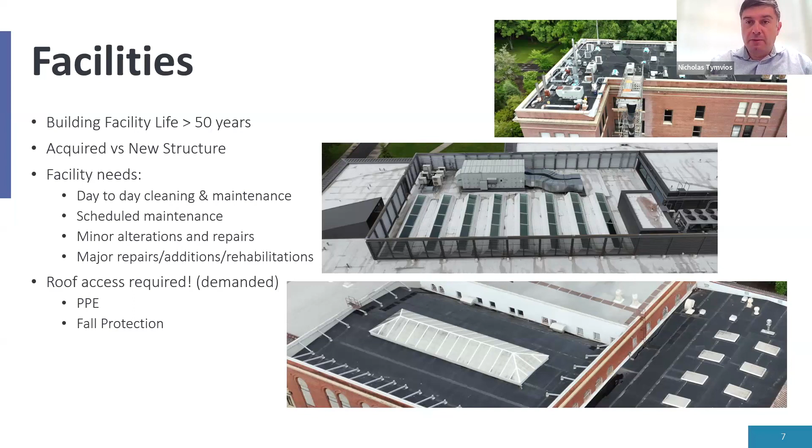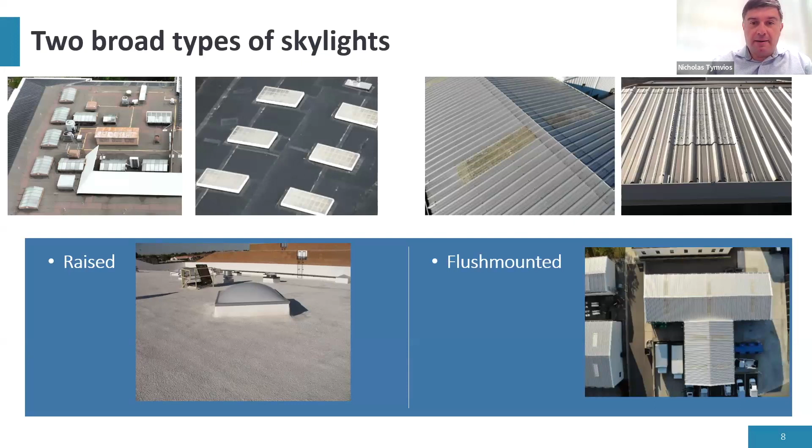We have two broad types of skylights, and we call them by the unoriginal name of raised, meaning they are protruding from the roof upwards, and there's probably a slight ledge in there. Here's one example. Here's a couple more. Or flush mounted, where, as the name says, they are flush with the roof surface, just like this example right here, which came in from one of the facilities that we work with.

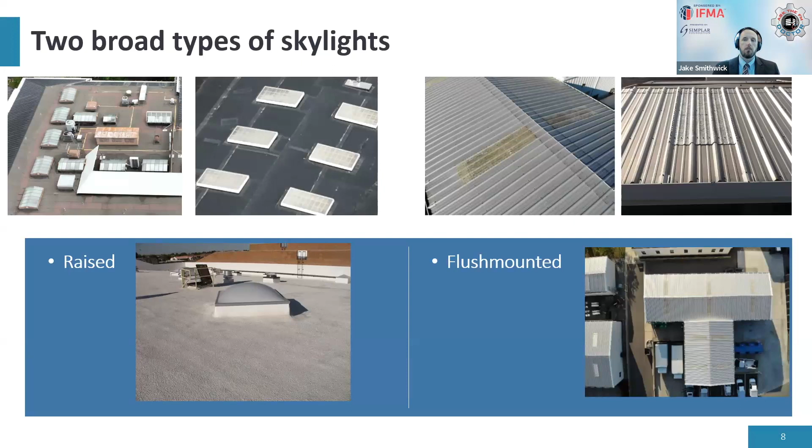Yeah, I think it's interesting, Nicholas, those flush mounted skylights. For anybody that's walked on a roof before, I've done a bunch of roof walks over the years, and look at that one on the upper right hand side. If the angle of that sun wasn't right, there's no way you'd be able to see that, right?

So I just think that what you're presenting here is super valuable in terms of helping us realize the real danger that we see in our roofs, and it's something that we definitely need to be concerned about. For sure, yes. And I would definitely not, I'm colorblind. I can't see that difference between those two colors. So for me, that would be a hazard waiting to happen to cause a fall right there.

So we looked at all these roofs, and the good thing is OSHA has a good database of incidents online. So we scoured that site between the years of 14 to 19, and we looked at any incident involving skylights that was available on that OSHA website. So we looked at a 6-year period from 14 to 19. We looked for this keyword skylight, and we discovered 204 incidents in that 6 years, which resulted in 112 fatalities and 93 injuries. In total 205 people. One incident had both an injury and a fatality.

When you look at that on a timeline, you immediately see that there seems to be kind of a discrepancy in there, especially with the number of injuries. They appear to be a lot in 17 onwards, but very few earlier on. But the trend generally is that the incidence of fatalities are increasing. So what we discovered later on was that not everything is reported to the OSHA website, especially for injuries. And we feel that, yes, the data is disturbing, 204 people falling through skylights in 6 years, but we feel that the data is missing, is underreported.

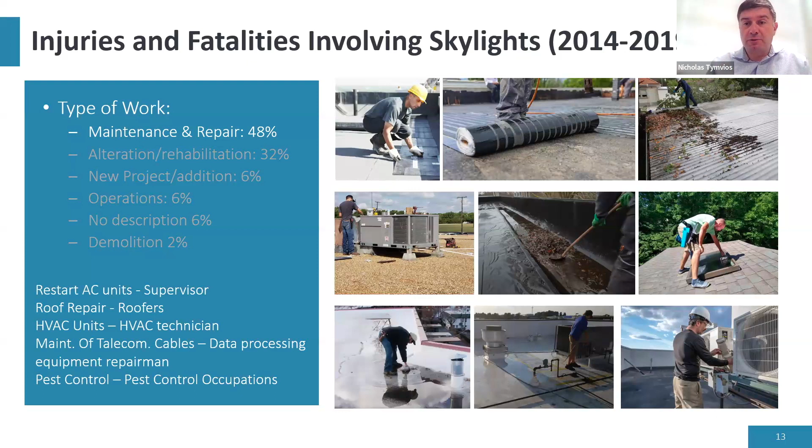When it came to alteration and rehabilitation of the 32% of the incidents, as you would expect, a lot of that comes with the construction trades and things like repairing of metal roofs, installing electrical wires, carrying equipment, vacuuming gravel, and applying waterproof membrane. The majority of these incidents included construction workers.

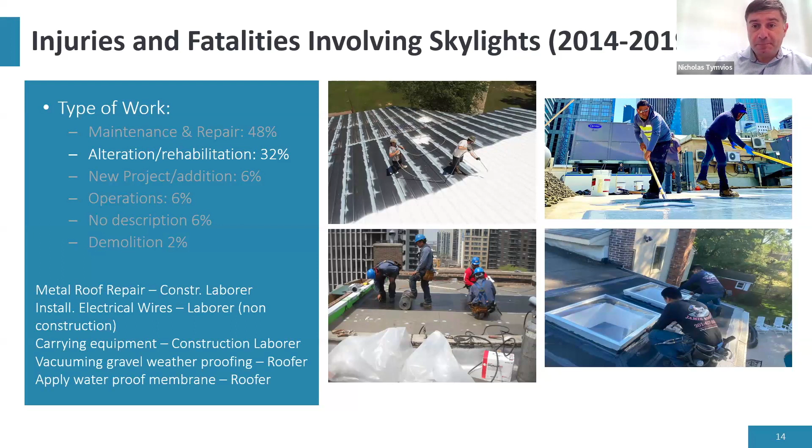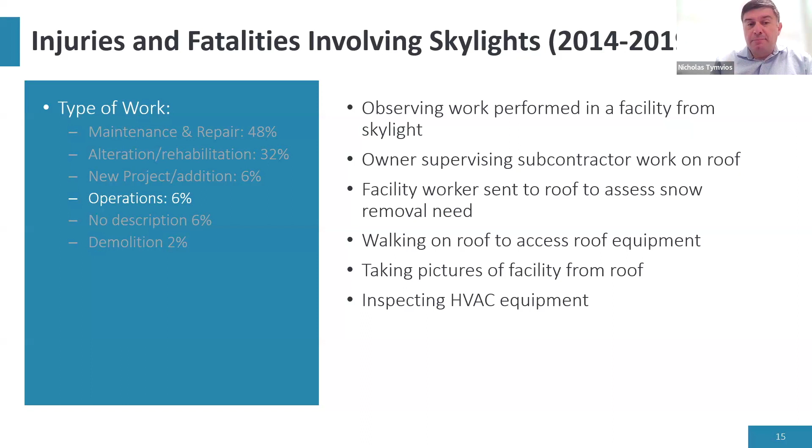In that category of operations that I described earlier on, we looked at people that were going about their day-to-day work, people who were occupants of the facility doing their day-to-day work, and they ended up falling through a skylight. So things like observing work through the skylight, owner supervising work, assessing snow removal if there's a need for snow removal, walking a roof to access roof equipment, taking pictures, and inspecting HVAC equipment as well.

So we ran through news reports from the different local sites and news sources, and we discovered several incidents that were reported in the local papers but were never reported to OSHA. So we cross-checked OSHA for any of these incidents, and they were missing.

Looking at the industries involved in all those incidents, looking at the employers of all those people who were injured or killed, as expected, the majority of them belong to a construction company, 14% in manufacturing companies, and all others, 14%. So you can tell from this information, it's not just construction workers who get injured, it's the occupants of the buildings as well. Looking at all those construction workers, as expected, the majority of them are roofers because they do the majority of the repair on roofs.

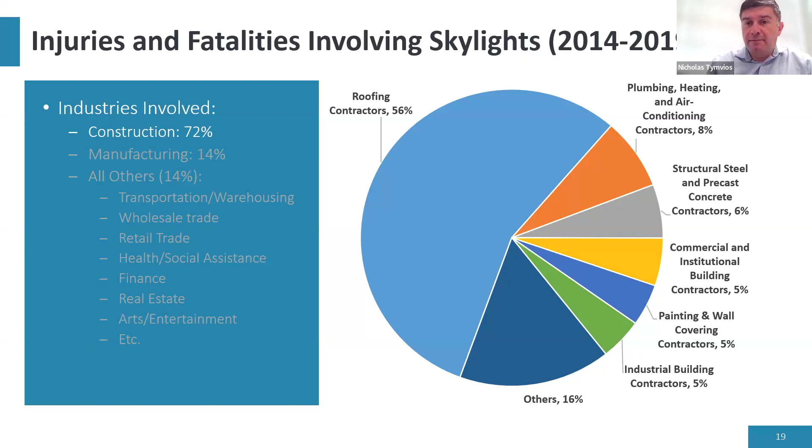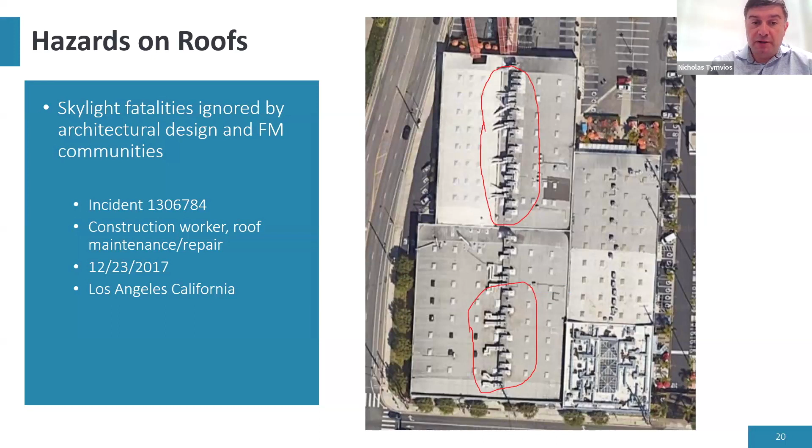We're also finding that many times roofs are becoming an extra floor for everybody for work or for generating electricity, as it happens in this case right here, where the building, an existing building in 2011, was a flat roof full of skylights. And then in 2013, they put a lot of solar panels, and all of them next to the skylights as well.

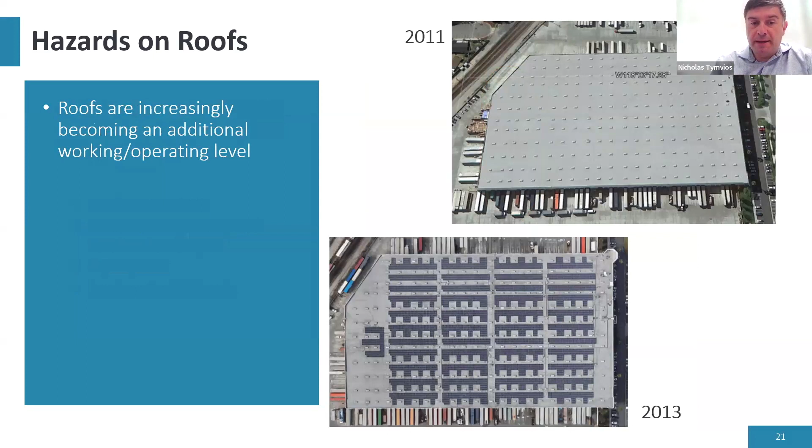And in 2018, there was an incident where a person not involved with the solar panel installation was asked to clean the solar panels and fell through one of those skylights. This was the second incident on that same facility. The first incident happened during the installation of the solar panels, but it fell outside our time frame of 2014 to 2019 to be included in the information here.

So we presented the hazard of skylights, and we showed that it's not just for construction workers, it's not just for roofers. Everybody can be involved in an incident involving skylights. So we need to find a way to protect ourselves and our workers when they go up on roofs. So here's a few solutions out there. Some are permanent, some are more temporary.

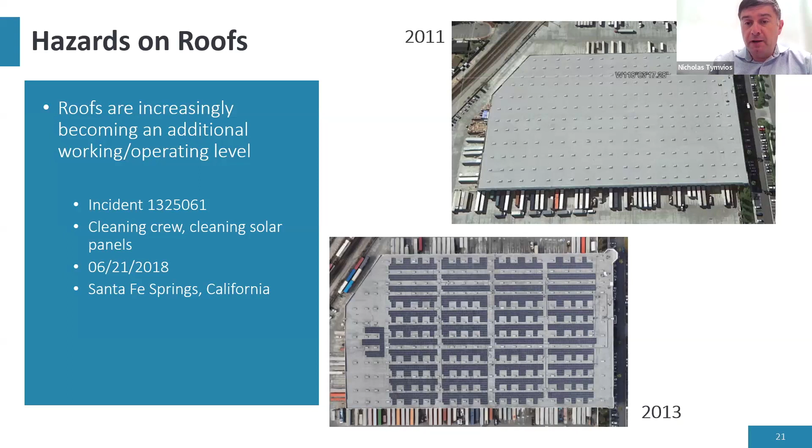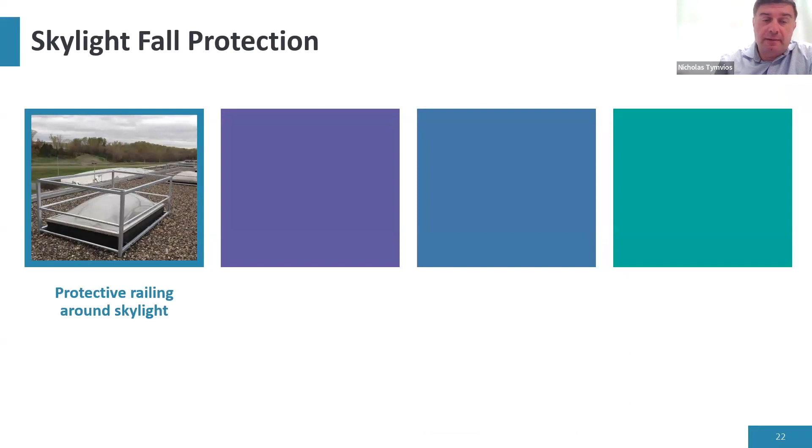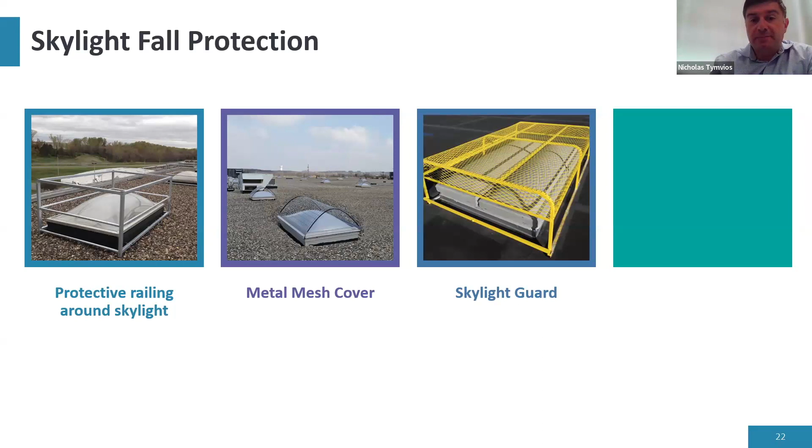So looking at more permanent solutions, we can install a barrier, a railing around every skylight. We can install a mesh over the skylights that can be used to prevent somebody from falling through it. We can go even further, installing a more robust skylight guard like this one here. And for those flush-mounted roofs, we can install something that looks like a wire mesh, but is strong enough for somebody to step on without breaking the skylight below.

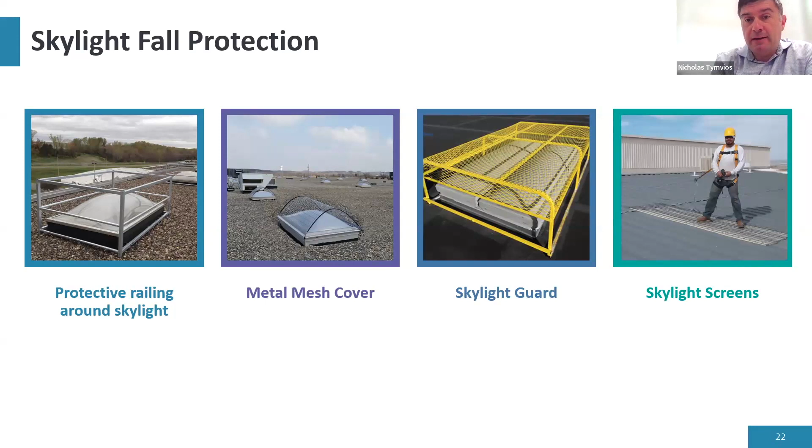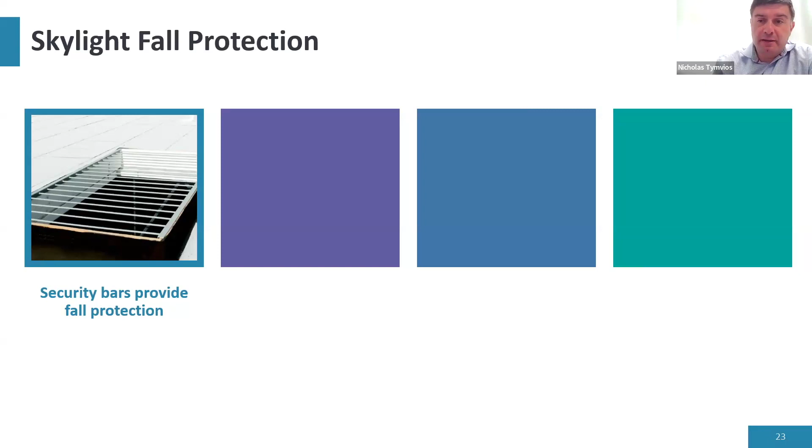Here's a few more examples. Some of those security bars that are placed on skylights can be used for fall protection. The skylight would shatter, but the person would not fall through it. We can also include a net with a ratchet as a temporary solution when we have people on the roof, so that if a person falls in there, they're caught by the net,

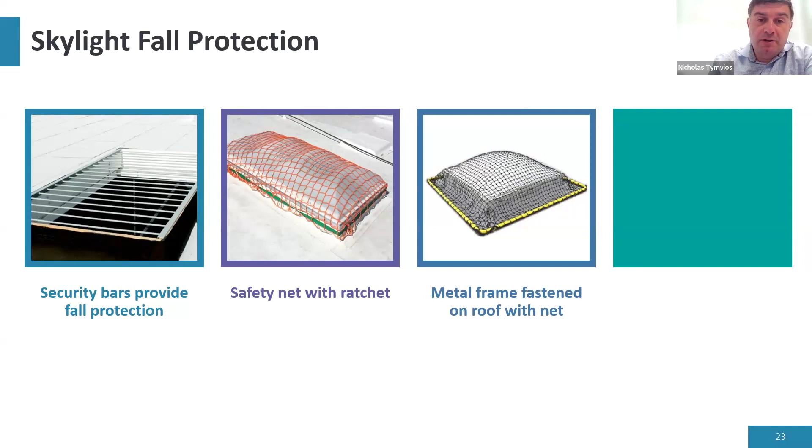or putting a net over a rectangular frame that will cover the skylight. So if a person falls on it, the skylight would shatter, but the frame would not, and would prevent the person from falling through, or even implement temporary guardrails all around that skylight or roof opening.

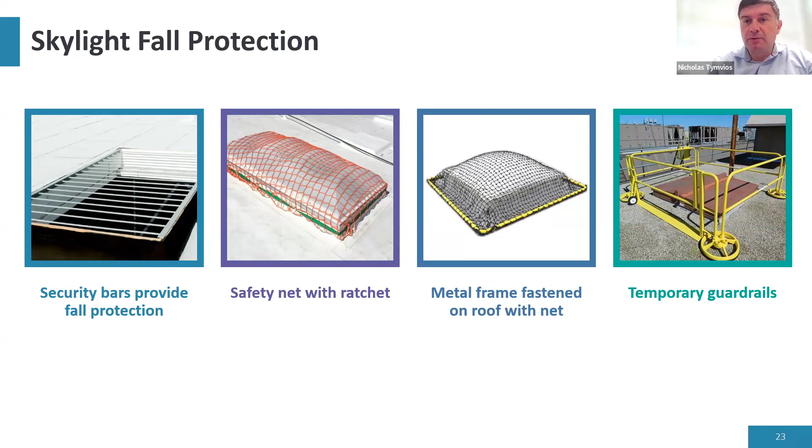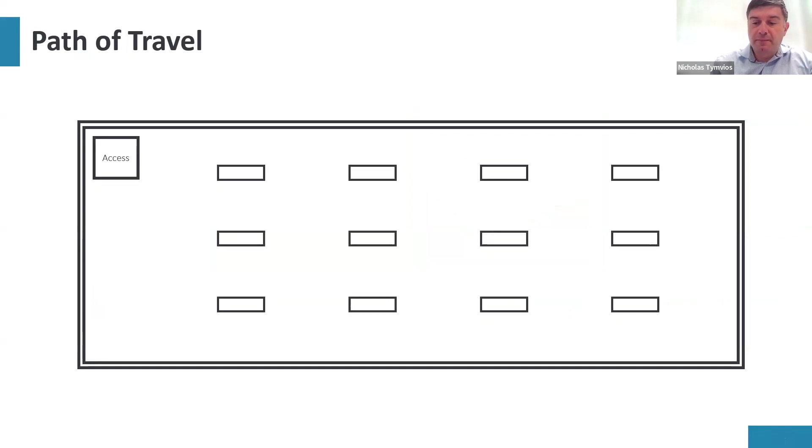Now, we don't ask you to install all those measures right away. We are proposing a solution called the path of travel. So if you have a roof with an access point and several skylights on the roof and HVAC units that need to be inspected monthly, if you're a conscientious facility manager, you don't want your workers to be exposed to that skylight fall hazard.

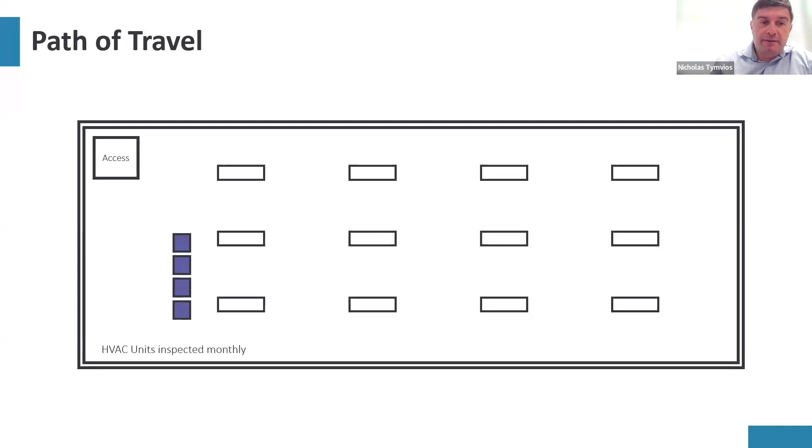So we suggest that you mark the access for your workers, indicating where they need to be walking and not deviating from the path. And that really includes actually marking the roof with arrows to show the path that they're allowed to be on.

And then for the two skylights that are pretty close to the HVAC units, implement those fall protection measures for those two skylights. So on this roof that has 12, only 2 of them would need to have proper permanent fall protection measures, because they fall within the 6 feet of the path of travel.

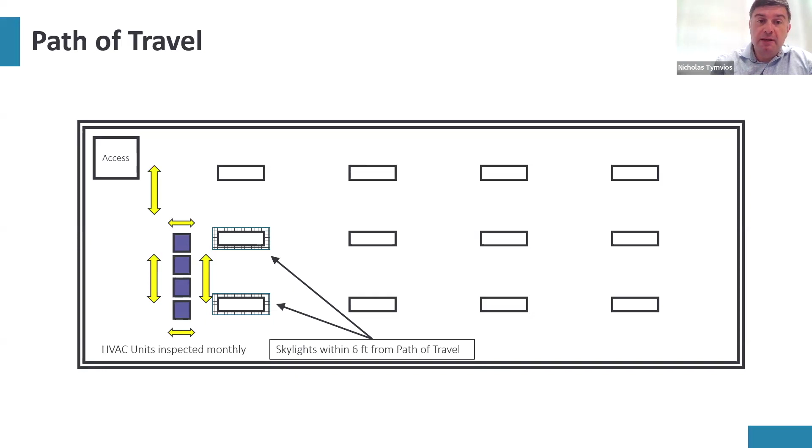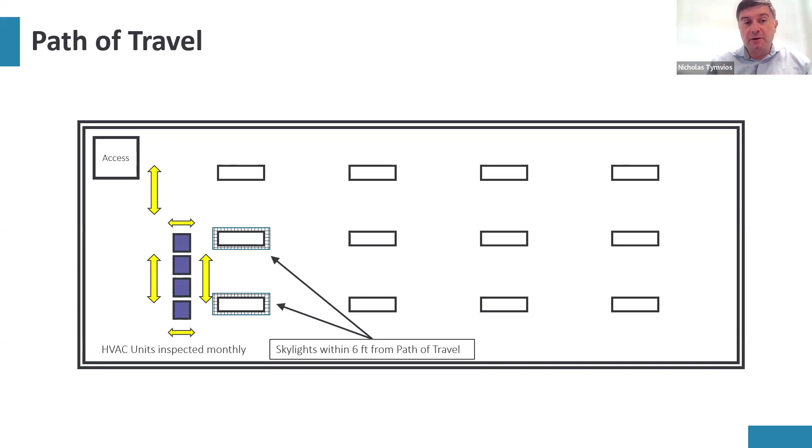Now, if you do include extra equipment on the roofs, and you are increasing the area that you need to have access to, then we suggest that as your work progresses and you're adding more stuff on the roof, you incorporate the fall measures as the need arises.

So we really ask you to assess the risk and apply fall protection where personnel is present. If future needs require access to more parts of the roof, apply fall protection accordingly, so that you wouldn't have to cover and protect all 12 skylights at the same time.

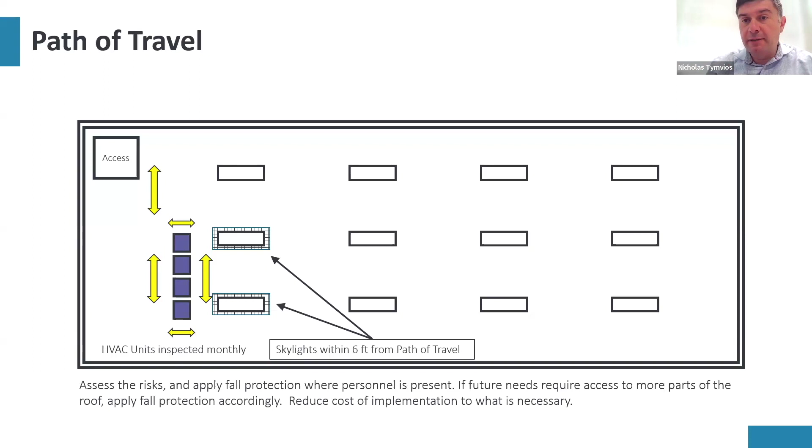So closing, some of the key takeaways that we have for this learning minute. We would like you to create an FM safety culture where you are part of the solution and decision team early on, whether you are buying a new building or building a new building. We want you to be involved in design so you can give your solutions to the designers. And think about how you can prevent hazards now compared to later.

Think of the path of travel, and you can incorporate that for other hazards as well, not just on roofs. Assess your safety needs for buildings you're considering buying. So think of an extra cost that would be there if your owner is thinking of purchasing another building.

And think of the lifetime safety aspect of a facility, not just for here and now, only when construction is present. We shouldn't be ignoring safety later on, even though you're hiring all those people to do work on your roofs. Thank you.

Fantastic. Thank you, Nicholas. So I'd love to hear from folks on the call here today. This idea of having skylights and making sure that, when our maintenance technicians have to go on the roof to maintain a piece of equipment or clean the gutters or what have you, I know personally, before I was heavily involved in this research, doing my own inspections for FMs, skylights were kind of an afterthought sometimes. We were aware they were up there. It was not something that was clearly obvious and marked, especially for those flush mounted ones where it's totally unclear.

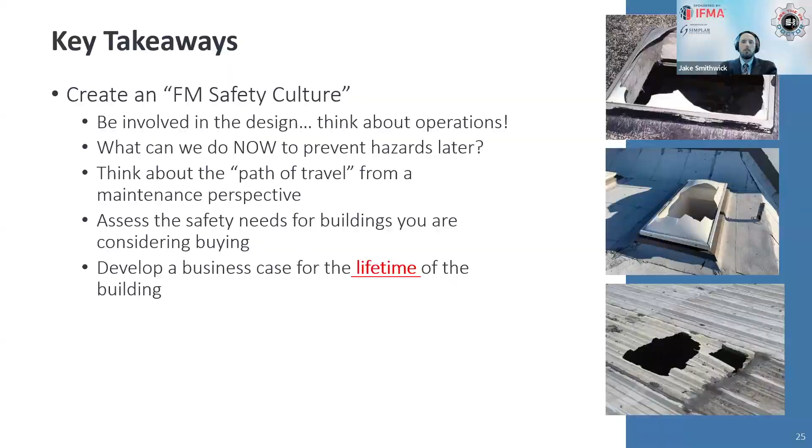But I would love to open up the time to anybody. What have you seen, or what practices have you taken on in terms of making things better, faster, easier from that standpoint? Ron, go ahead.

Well, I come from a design point of view as an architect, but teaching in an FM school program. And in architectural training, there's basically no training about safety on buildings. It's all about what skylights provide for interior use. And even those come up with problems, like people getting fried below skylights, but the actual safety aspects, there's really no consideration from designers.

So that's why we're teaching in an FM program. This is really valuable information because designers or architectural technologists don't learn anything about safety of buildings. Even just understanding things like safety features on roofs is basically not part of architectural education.

Yeah, absolutely. It's super interesting. Nicholas, you've done some work in that space too, about the fact that for a lot of design professionals, as part of their schooling, as Ron alluded to, this is not normally part of what we think about. What have you found from that awareness standpoint of safety and how it affects the design and construction process? Right. So many engineers and architects, as the overall group of designers, are generally not aware of